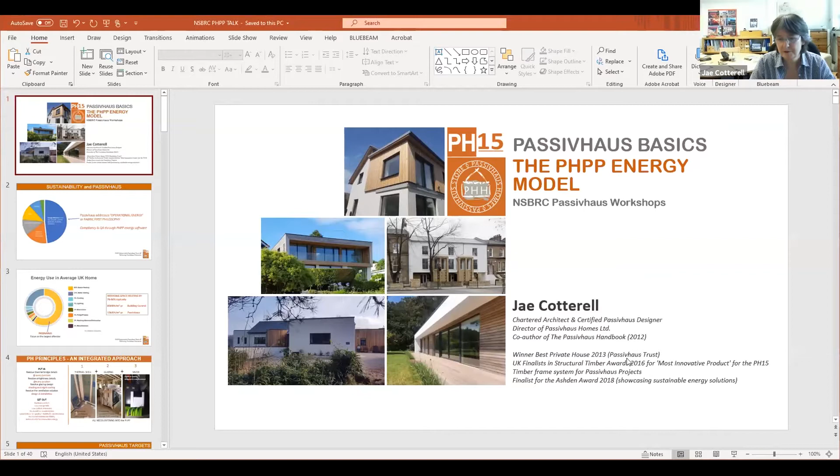I am an architect and I've gone slightly AWOL in that I now provide low carbon solutions for buildings, for net zero carbon housing if people want to go that far, using Passivhaus principles, in order to get the operational carbon really low. We're also interested in low embodied carbon and in using non-carbon fuel sources or low carbon fuel sources. So we're interested in those three things, and we use Passivhaus principles to get the operational carbon down, and we're using the PHPP energy model to check that and to design that.

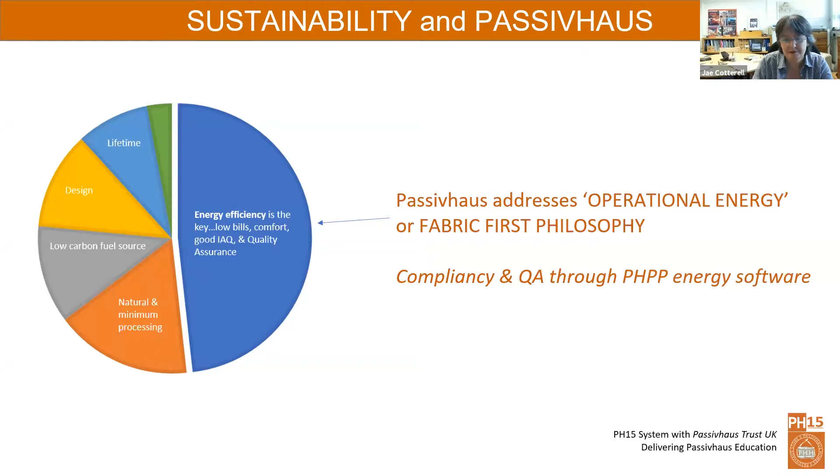So here we are talking about sustainable housing, and the three big bits of what I've just spoken about: the Passivhaus bit, which is the energy efficiency bit, the operational carbon, shown in blue, then there's natural and minimum processing, which is how you actually build a house, and then there's the low carbon fuel source. The compliance and quality assurance for the big blue bit is all done through the PHPP energy model.

When you're looking at operational carbon, you're looking at that big yellow bit, so that's all the operational energy that you're using in a house. Passivhaus focuses on the big element of it, which is the space heating, that's 60% of an average house's energy. If you're building a new house to building regulations, you'd be on average achieving something like 86 units of energy for every square metre of your house in a year, whereas the Passivhaus minimum, which is 15, is what you're allowed. So it's a 70 to 90% reduction when building to this sort of standard. It really is something quite significant.

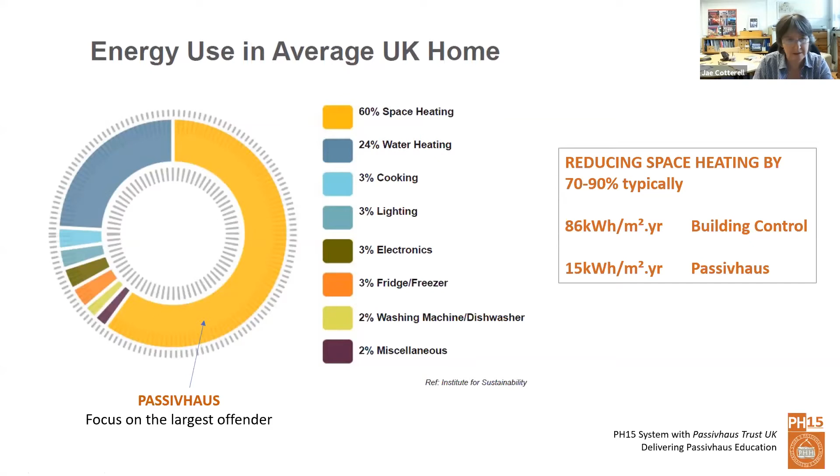It's an integrated approach, meaning you have to do various things to get various things out. The three main things you put in are the thermal shell, then any holes you make in it—filled with glazing or doors done to a very good standard—and then a ventilation solution. You can't take just one of those three and throw the others out; you need all three to come together.

Once you've done that process, you get your low carbon emissions, which I'm particularly interested in, but there are all sorts of other bonuses that come with it.

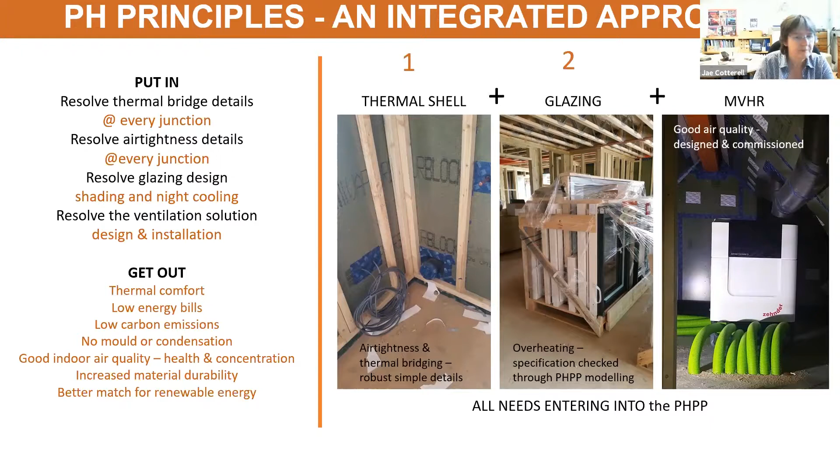When you come to the PHPP, you have three targets you can aim at. It used to be just one, the classic. Now there's plus and premium. Premium is very extensive—I've tried it once and it needed a huge amount of renewable energy. The middle one, plus, is basically where net zero carbon sits.

That's where you do the fabric-first ideas of Passivhaus—getting your house shell correct, getting your windows correct, getting the ventilation system—but then adding some renewable generation on site, getting it to a place where you're generating as much as you're using through an average year.

We try to model to the plus standard even if the client isn't wanting to go there, so they know at least what they need to do to get there and can perhaps plan for it in the future.

The targets that the PHPP modelling software spits out are the space heating—that 15 figure we talked about—but it also looks at all the energy of the house, including hot water and lighting and so forth.

The critical thing we use PHPP mostly for is calculating the overheating frequency, because once you go to these low carbon energy efficient houses, the risk isn't that you'll be too cold, but that you'll be too hot. PHPP is a way of looking at that and designing it out.

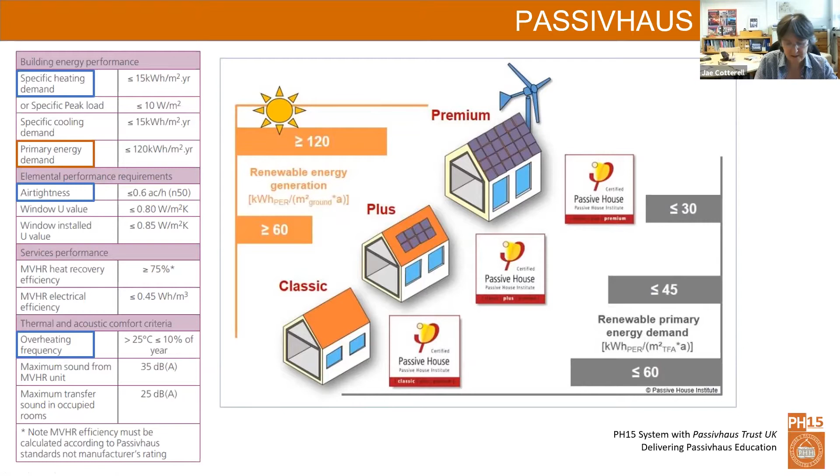It comes in the format of a disk. It's not actually very expensive, PHPP—it's very easy to buy. It comes as an Excel spreadsheet, basically lots and lots of pages, which I'm going to show you.

It has six dimensions to determine shading, because as I said, overheating is quite difficult. So it can be a bit time consuming and confusing, but it is accurate—known to be accurate. If you're not using it regularly, it's not very user friendly, I have to say.

It's the way every design is checked by an external certifier if you're going to certify to Passivhaus. So we will do a PHPP, but if it's going to be certified, it will always be checked by someone external to us.

The other option, if you're an architect—there are a few architects listening—is to go for design PH. That's a little more expensive. Basically it's a 3D design tool that plugs into SketchUp, which hopefully quite a few of you are familiar with.

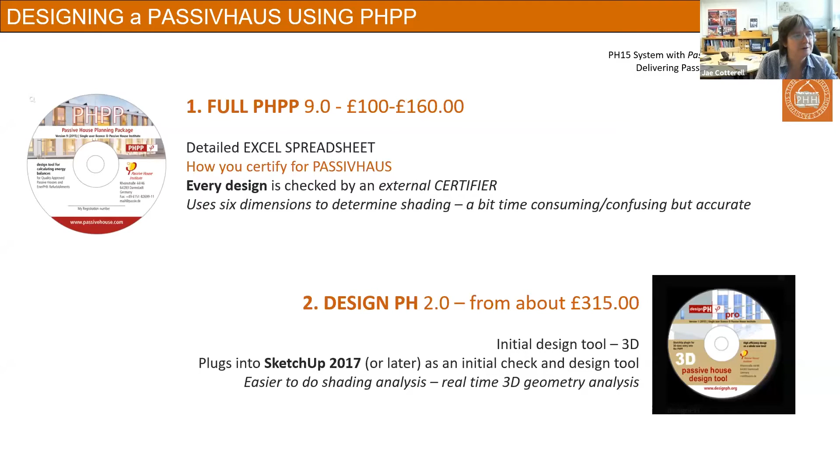It's much more user-friendly, less likely to make mistakes, and you can do really good shading analysis because it uses the 3D geometry to analyze it. So I'd recommend that to people who want to have a go but who are never going to become highly familiar with using PHPP—they'll be using somebody else to do that.

When you start using PHPP, you're looking at the planning stage. You want to design with either Design PH or the full PHPP before planning. We do the full PHPP before planning, and you end up with drawings a bit like this.

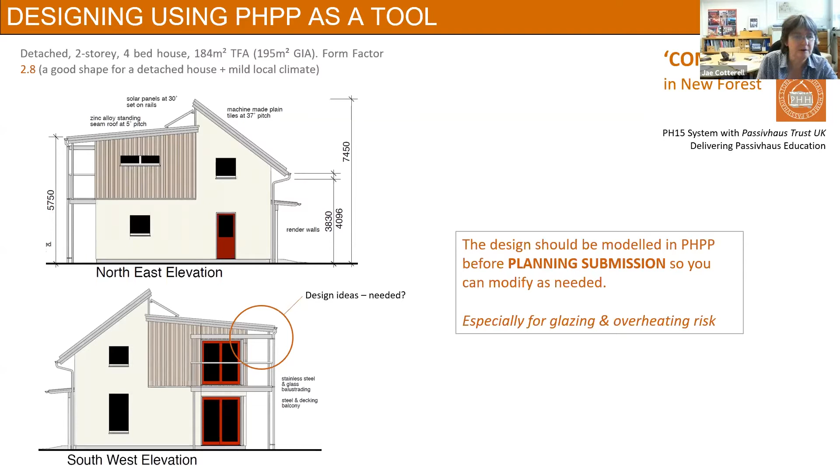This is a house in Compton that we're looking at here, and from here we can start to insert all the necessary data into the PHPP model. I'm going to show you now what the spreadsheet looks like when you open it up.

There's lots and lots of tabs along the bottom, and I'm going to go through the main tabs with you to show you the sort of detail that goes in when the PHPP is being done. The verification page at the beginning, which you'll see in a minute, is just telling you where you are with these headline figures.

But the first real tab is the climate, and there's lots of data preloaded in. Basically all you're doing is choosing where your site is. For this one, the nearest climate data set was Efford - I just pick this on a drop-down menu and it populates, and that's all you're doing. You're also adding your altitude. Strangely, altitude is very important to make sure you get it accurate for your particular site.

Interesting, because you can then take your house and fly it round in the PHPP, which I quite enjoy. This particular house was on the edge of the New Forest, but I could change the climate data and fly it to a site in Scotland to see how it performs there. There are big differences according to altitude and where you are, even within the UK.

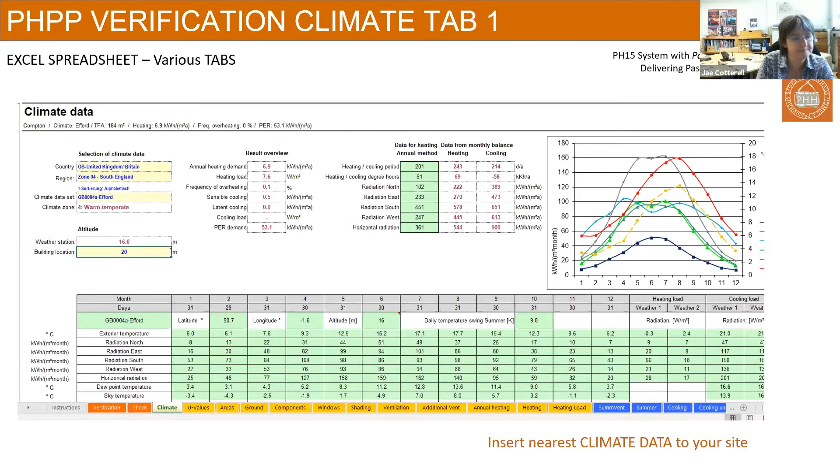And then you have to try and start thinking about how you're going to build it. Passivhaus U values have to be under 0.15 - that's the thermal efficiency of your walls, your roofs and your floors. Usually with our system, PH15, we're looking around getting to 0.1 to 0.13 to get past the line for Passivhaus.

So you're deciding on all your assemblies, and then you have to calculate the U value of each of those elements. You can, at the design stage, just assign notional U values, so you can sort of trick it, or just say I want it to be about this, or you could start to see what you need to get to for these elements in order to pass the line.

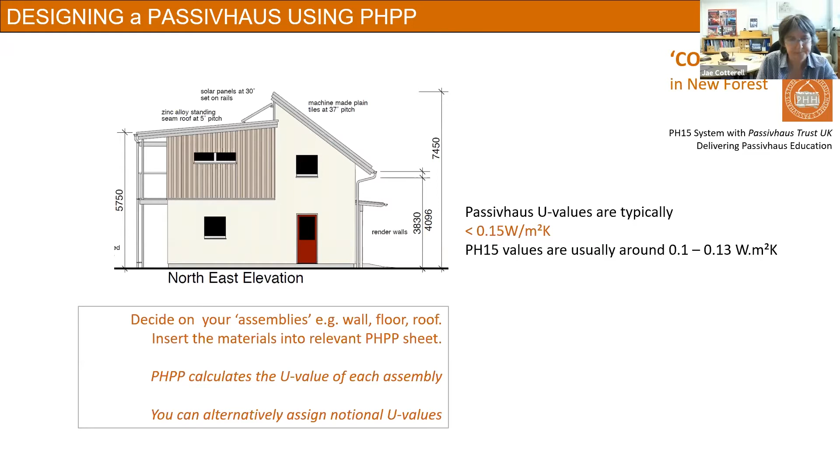I make this point here because obviously we're choosing timber, and that's because of the embodied carbon. This has got nothing to do with PHPP or Passivhaus, but you can see according to how you choose to build - Passivhaus is the way you build it, it doesn't have anything to say about how you're building it, you just need to build it to the principles. But you can see that there's 4 times more carbon in traditional masonry when you're building to this sort of standard, 3 times in SIPs with oil-based insulation compared to a timber frame. And that's why we go timber frame, because of the embodied carbon.

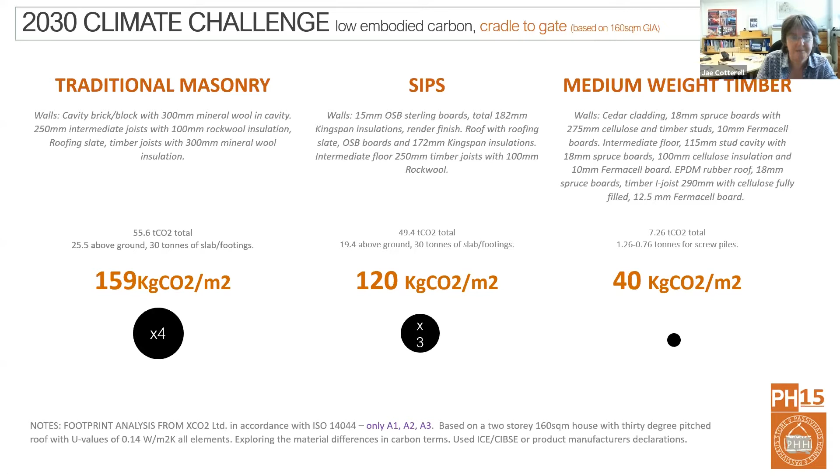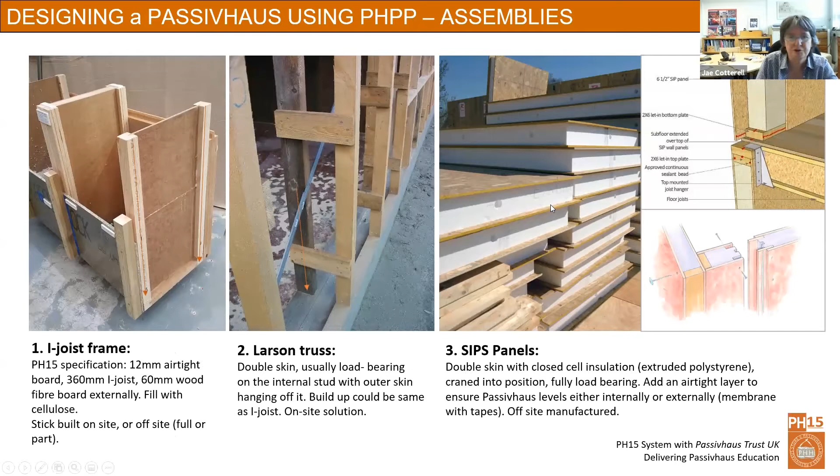So here's three different timber frame assemblies, just to give you an idea what we mean. This is the way I build, with an I-joist and an airtight board and wood fibre. This is called a Larson truss, and here's a typical SIPS panel. So you have to choose your assemblies, and that's for your roof as well and for your floor.

Now we come to the actual verification page. There's a few interesting things on the verification page, just to show you how detailed they are. There's something here called the specific capacity, which is which one you've chosen - masonry's heavy weight, our system is deemed medium weight, and that SIPS solution would be deemed lightweight. You put a figure in here to reflect the thermal mass of your chosen construction method.

And then it makes a few assumptions as well, like it assumes how many people are going to be in your house, depending on how big it is when you start to fill it out. You might find that you're going to have more or less people than that, and there's a little button here that you can use to determine how many people are in the house. If you're doing social housing as an architect, I would suggest you might want to check it for having a higher occupancy level and see how it performs. So it lets you have a little play with those sorts of ideas as well.

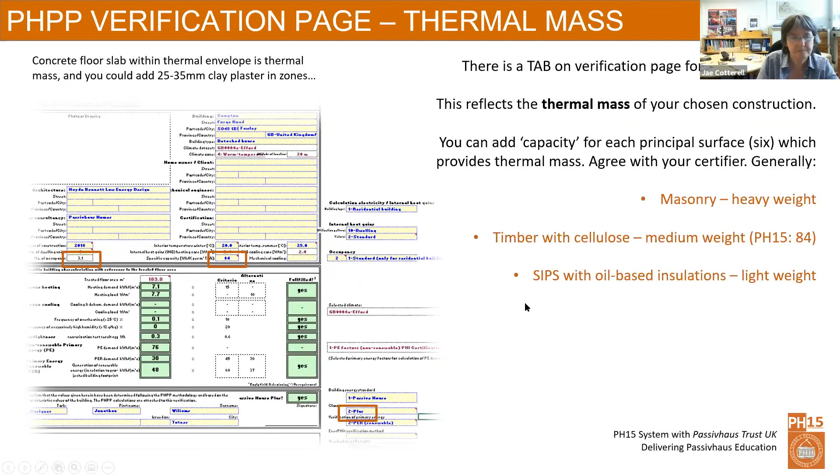And then down here you choose which of these 3 standards you're going for - are you going for a classic? Here we're looking to see at the plus standard, have we passed, and here are the headline figures, and here are whether we fulfilled them or not. And we go to the next sheet now, and this is the U values, and you can see you label each of your assemblies and you put in what you need - so this is a ground floor slab.

We've got a concrete slab here. This is called the thermal conductivity - every material in the universe has one. You find out what that number is and put it in, then say how much thickness you have of each material. I've got 175 of Celotex, and it calculates the U value out. Generally all the yellow boxes are where you put things in, and the green boxes are where the PHPP calculates it. The lower the U value, the better it is.

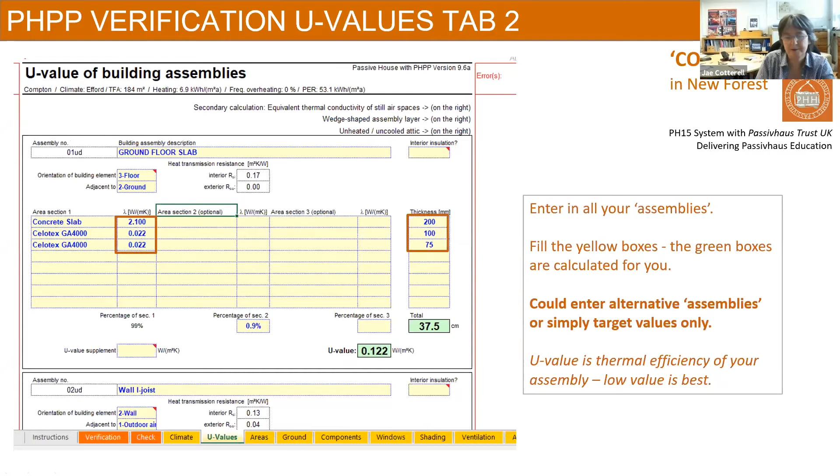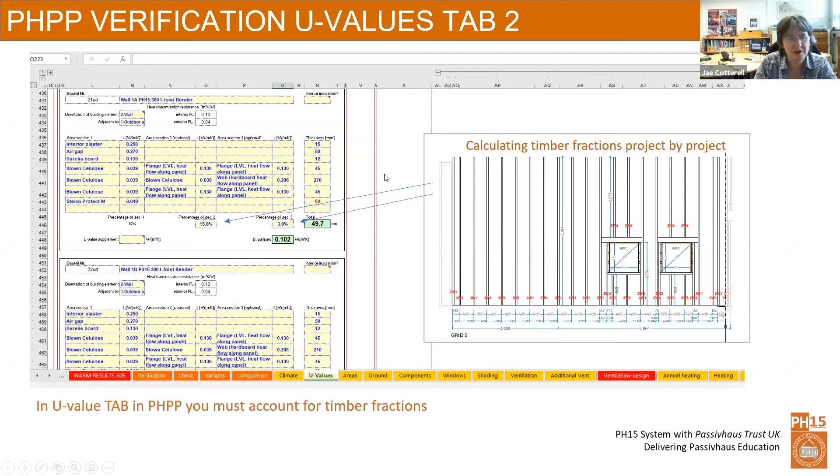It gets a bit more complicated sometimes. This is our wall where there's lots of insulation, but there's actually some timber in this wall - it's a timber frame. You can see there's lots of timber here. I'm saying 15% of that insulation is actually bits of timber flanges, and I've got some webs for my I-joists at 3%, and that adjusts the U value up to account for all this timber in my wall. This is what happens when you have poorly designed timber, lots and lots of it - what's called the timber fraction - and that will severely affect your U value at the end.

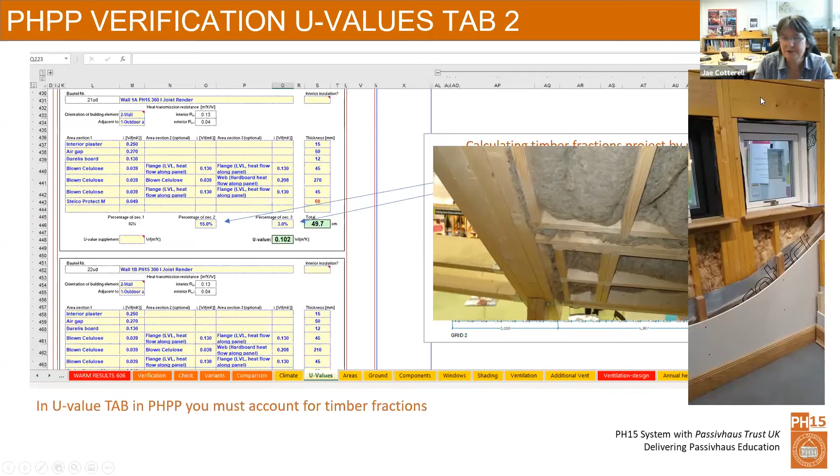Passivhaus is very rigorous about this sort of thing. It won't let you just put in a point U value - it wants to know how you've actually designed this house, and we have to show the certifier to justify these figures so we're not fooling anybody. Here's another example of a wall very badly done. Someone actually thinks that's good, but when you think about how much of this wall has been stuffed full of poorly designed timber structure, it's really going to affect your U values.

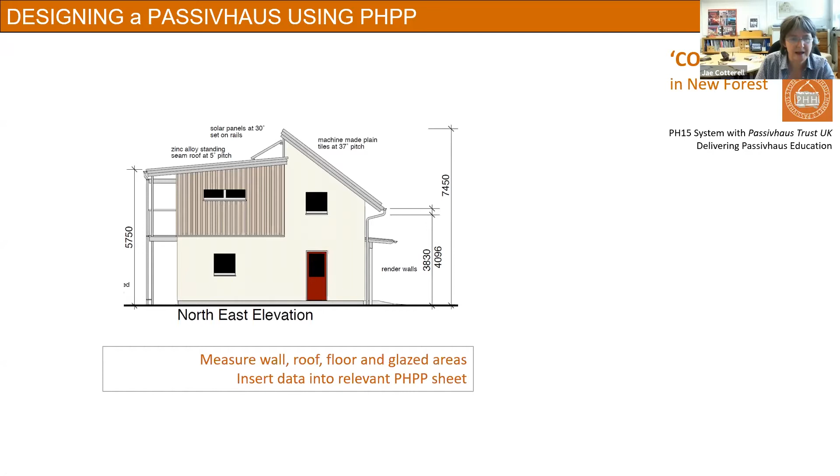Now we start actually measuring the areas - your walls, floors, roofs and glazing areas - and you put them into a sheet. I'm just going to show you how you measure, briefly. This is getting a little technical, but you take the whole height of the insulated element right from the top on the outside edge to the bottom - here's a floor with a concrete floor and some insulation, and you go right to the outside edge of the insulation. So you actually end up slightly over-calculating the areas.

The difficulties always come where elements join - this is where we get thermal bridges, which PHPP is very thorough in covering. If you do a bad detail where this joins here, you might have, say, 30 meters of this poor detail that's really leaking a lot of energy. If you have a good or poor detail, you need to prove it by doing a little model. This one happens to be a very good detail, and it comes out with a negative psi value, which is very good.

The reason you can get a negative psi value is that you're over-egging your areas when you're doing this - that area there is being measured twice. So if you do this little join in the middle very well, you can end up with a negative psi value and a little bit of benefit there.

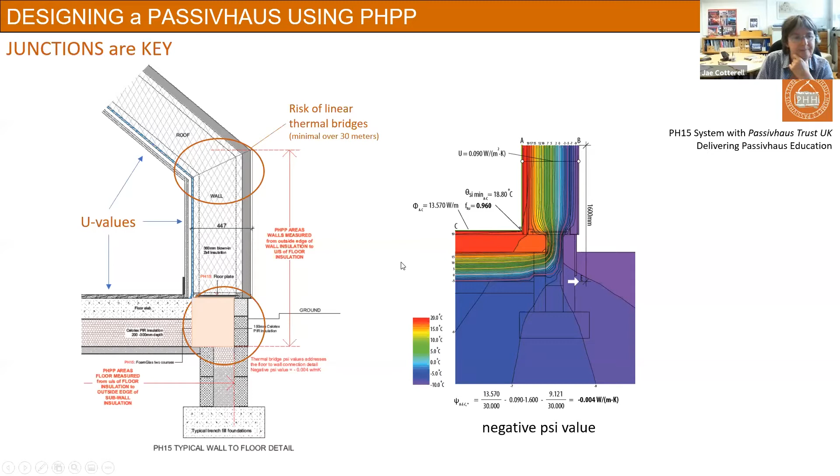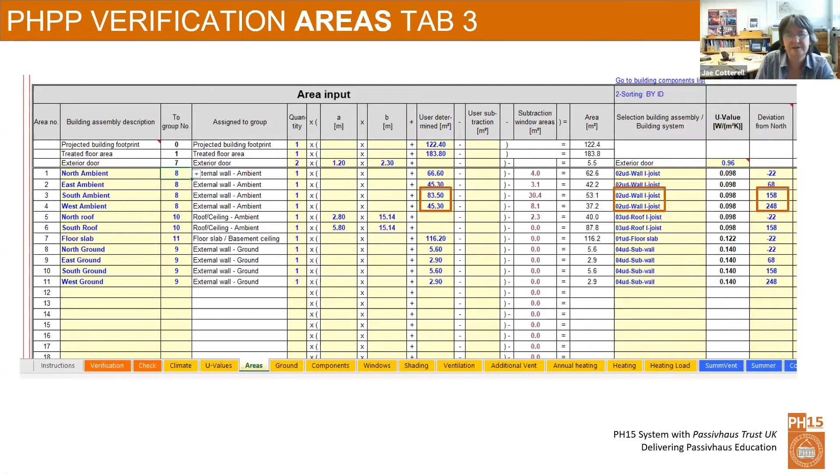So you're putting in your walls here - here's one, this is a south wall. I've got a south wall, and I'm putting in an area. I've measured how big it is and assigned which of my assemblies from that first sheet - so this is a wall I-joist, already worked in. It puts all that data in, and I also put in its deviation from north, so it knows how big the wall is, what its orientation - south, north, east or west - is, and how it's built.

Then I go on to my windows. I'm not going to talk too much about this other than to say that with our uplift from building regs to Passivhaus, we normally think ours is around the 5% mark, and half of that will be the windows - because they're so important. There's lots going on with them; they're not at all like just a standard UK window.

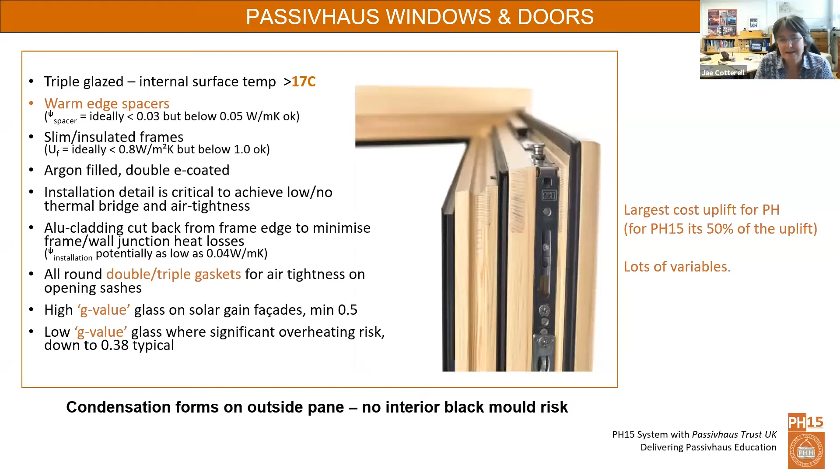So there's the air tightness around, you know, there's these three gaskets, and also the glass that goes in it. There's all sorts of things you can do with the glass, letting more sun in, letting less sun in, and all that information is going into the PHPP.

So we're on the next tab here. I'll just talk a little bit about, we've done U values and areas. This ground one is pre-filled in by the Passivhaus Institute. We never really mess with it, though I think if you had some strange ground conditions, you might have to. The components section is just where there's preloaded lots of components.

So lots of windows and glazing things and ventilation systems are preloaded into this area, and then you can pick them out when you put your windows sheet in. So here, this will have been picked out from a list in the components, and this window will have been picked out from the components. We actually have a pre-filled out PHPP where the windows and glazing elements that we use in our system are already all listed in there, and you literally just press a button here and you have a drop down menu, you click and up it comes, and then it starts to populate all the data.

So all I actually need to do is number my window, give it its opening, and tell it which of the walls that I have put in the area sheet it belongs to. Then it knows the size of the window, which wall it's in, which glazing, what sort of glazing it has in it, and which frame, which window itself, the frame of the window it is, and then it will calculate all the rest of it.

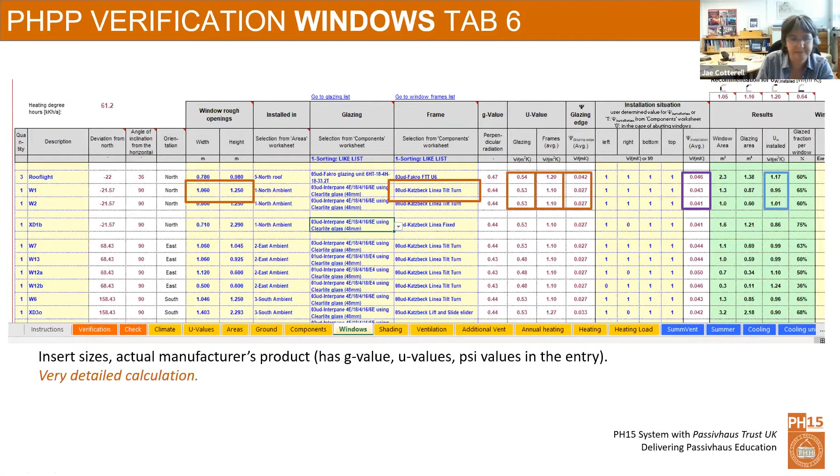This is just a little bit of a confusing slide, perhaps, but I'm showing this as a window sitting in a wall, and it's an okay installation detail, and there's a psi value for that. This has been modelled, and it's 0.029.

I only say this because this one is much better, 0.019. The reason is there's just a few tweaks been made. It's been pushed a little bit back in the window, in the wall. This one is more to the edge of the wall, and the metal cladding on the outside has been cut back on this window, and it's not been cut back on that window.

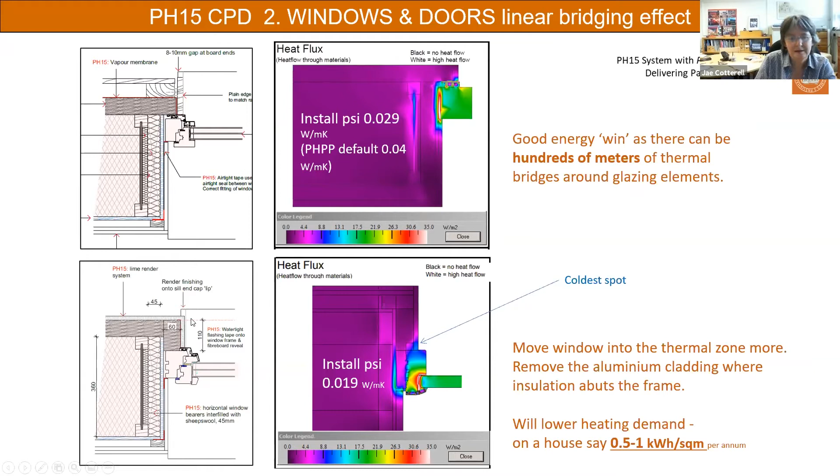None of these have got anything to do with price. This is just to do with good design, and that's why, with us, with our system, we're always tweaking it, because actually good performance doesn't necessarily mean money. Sometimes it just needs thought and an understanding of what you're doing.

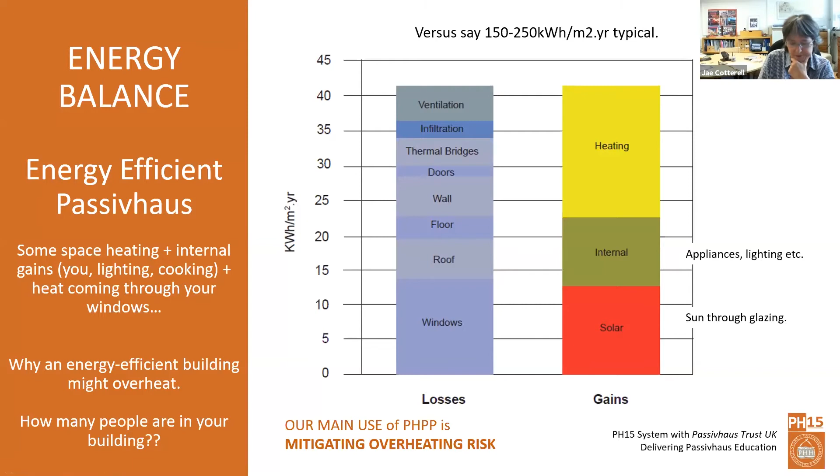And that's why if this gets out of kilter, you soon begin to have problems with being too hot. That's why low energy houses are so sensitive, and that's why there's a tab especially just for shading. This is actually the tab that we spend most time on.

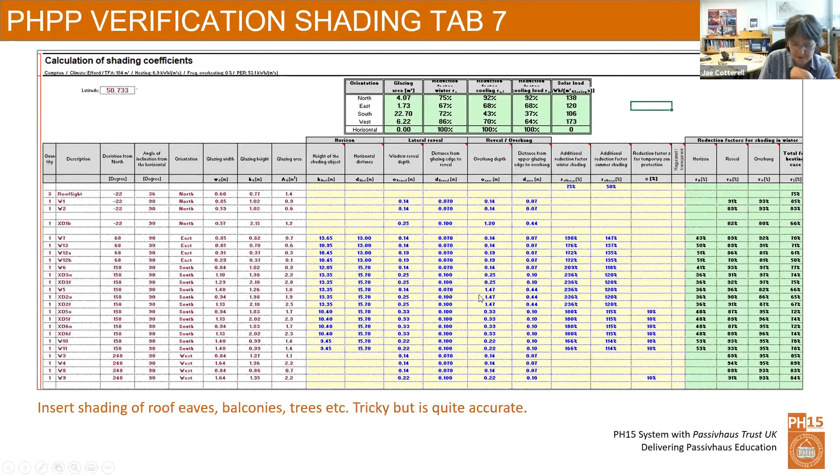And then this is if I'm using any external blinds to shade. So there's all sorts of things I can do, plus the glass itself, which I just mentioned, the quality of the glass, or what's called the G value of the glass, I can change in my windows. That will change how much sun is allowed through the window or not. So there's lots of different things that you can do to tweak your overheating risk.

We will choose windows in our houses for night ventilation, and we'll discuss those with the client. So if you're thinking of building a house, you've got to think which of these windows you'll use for night cooling on very hot summer evenings. Then we'll give the client the choice of perhaps adding fly screens to those windows.

It's really important - if you were to take the quantity out, put naught in there, and went back to the verification page, you'd see how significant having those is to hot summer days and nights, and how important it is to have a night cooling strategy. Therefore user behaviour is actually quite important in an energy efficient house. If you didn't do that behaviour, you'd be much more uncomfortable in that house for 2, 3, 4 weeks possibly of the year.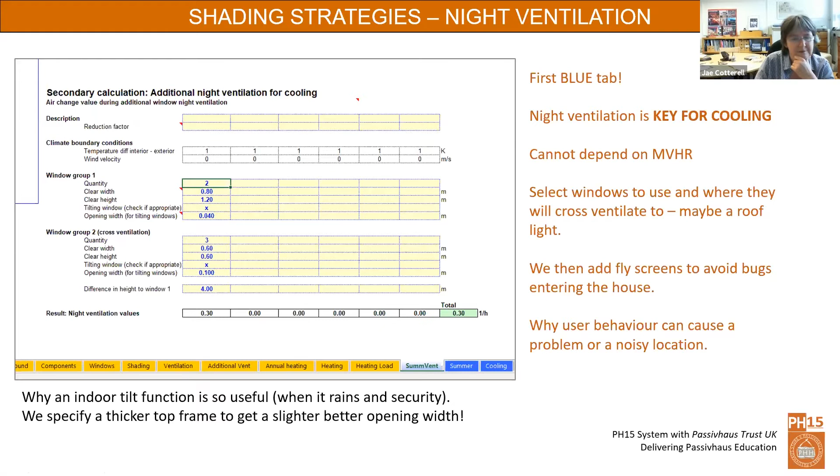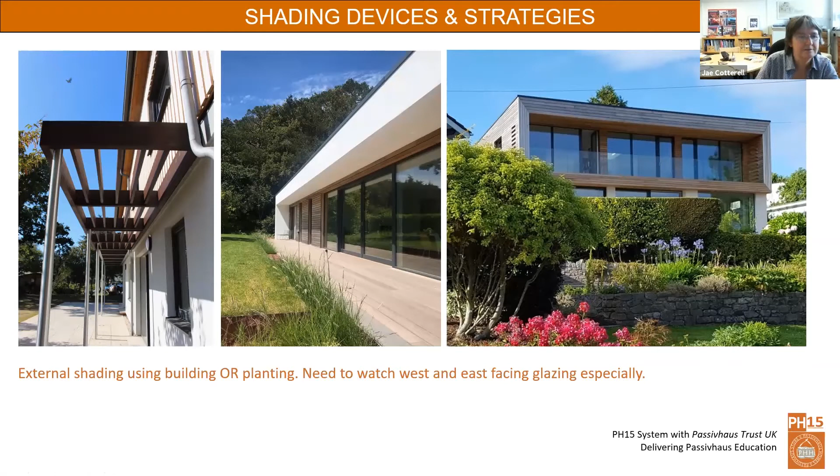And these are the sort of shading devices you might be using. So just overhangs, we've got overhangs there. We've got an actual shading device being built onto a house here. Here we've got a veranda being used to provide some shading.

And then you've also got things like this - we have the option in our windows for external blinds that come attached to the windows, get built in, and then you can see it come down. When it's up, it's hidden in the wall, so you wouldn't know it was there. They're electrically operated, and quite a good solution for windows where you might have a problem.

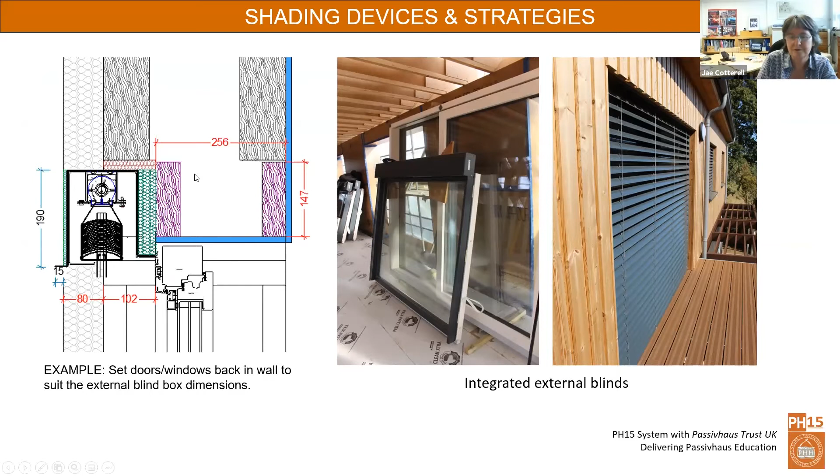Now, the reason I'm going on about this with the PHPP is because we have a warming climate, and we stress test our houses, and we find that maybe the overheating percentage could treble in the lifetime of that home. So let's say by 2050 or 2060, your house, which was designed to overheat maybe 8% of the year, might find it's now a quarter of the year too warm.

So the Passivhaus standard allows you 10% of the year for your house to be over 25 degrees. Well, that's far too much. The Passivhaus Trust says that 5% should be the maximum, and we try to get under 2% because it's not a static thing - we know we're going to have warmer and warmer summers as we move forward.

The final thing is MVHR, the ventilation system. You have to put in a Passivhaus certified unit - it's the only thing that must be certified in a Passivhaus. You're basically supplying fresh air into all your living spaces, and taking it out of your wet, smelly spaces. You're choosing to control your ventilation rather than having uncontrolled ventilation, which is what we live with at the moment in the UK.

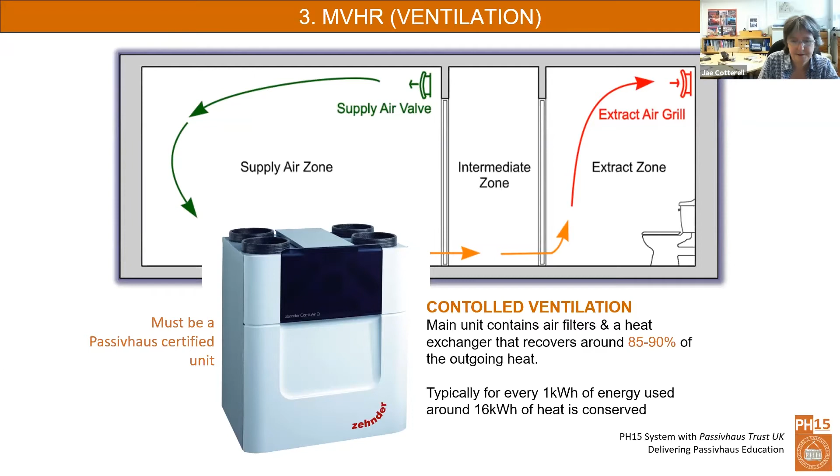And for every unit of energy that unit is using, typically you will be conserving 16 units. So it's a very efficient way of providing your ventilation. Here's some pictures just to show you need to provide some space - this is a big house, but it's to show you how significant the space might need to be for a ventilation system. This is one sort of a tree supply of the ducts.

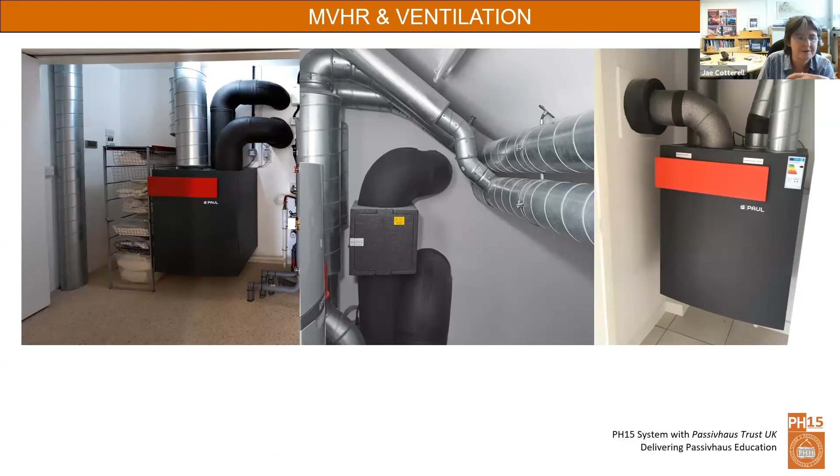Here's one that we do - we do a radial system. So each house would have 1 or 2 of these ducts going to it. There's a couple of distribution boxes, one for the supply, one for the extract. Here's the main unit - so there's a lot of these ducts flying around the house to supply your fresh air.

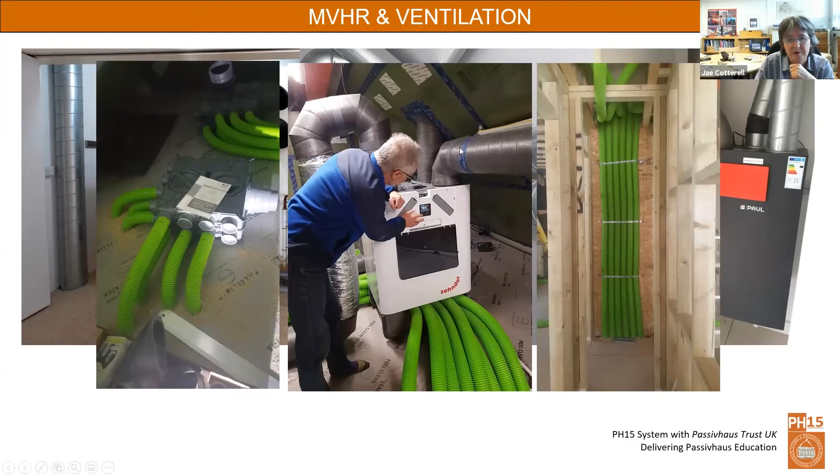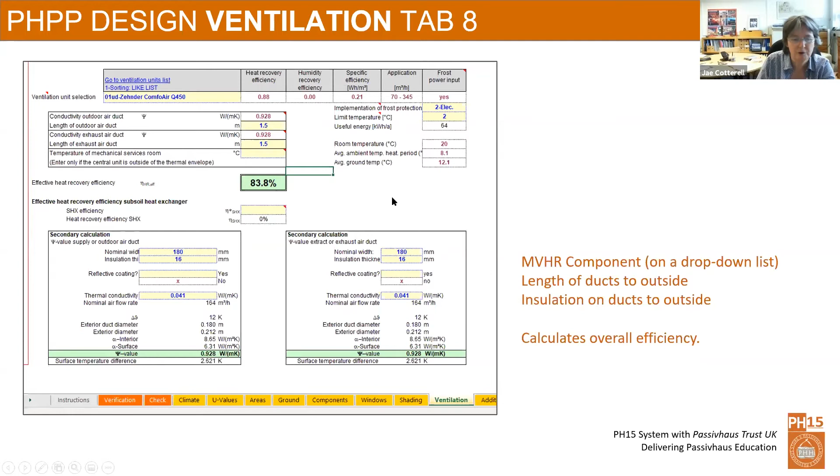There's a few things that are significant about it that the PHPP is interested in: the length of the ducts from the unit to the outside, and how well insulated they are. So when you come to this tab, you have to put in the length of the outdoor air duct, its size, and how much insulation is on it. You'll be surprised how much that affects the effective efficiency of your unit.

Not too complicated to fill in, but very key to overall performance. So all the elements are important - your assemblies, your glazing and the MVHR - and it's essential to have someone who's familiar with PHPP, or who's going to take quite a bit of time making sure it's right. It does help to use a known system.

Once it's all loaded into your PHPP, then you can have a bit of fun, because none of this so far has been fun really - it's just been a task of number crunching. But once you put it in, you can start to play with it, and that really is fun. You can add insulation depth, amend U values up and down, change the materials, swap windows and doors, take them in and out, change their sizes, change the glass spec, add shading, and change your MVHR. All these things you can do in a twinkle of an eye, and you can see the results.

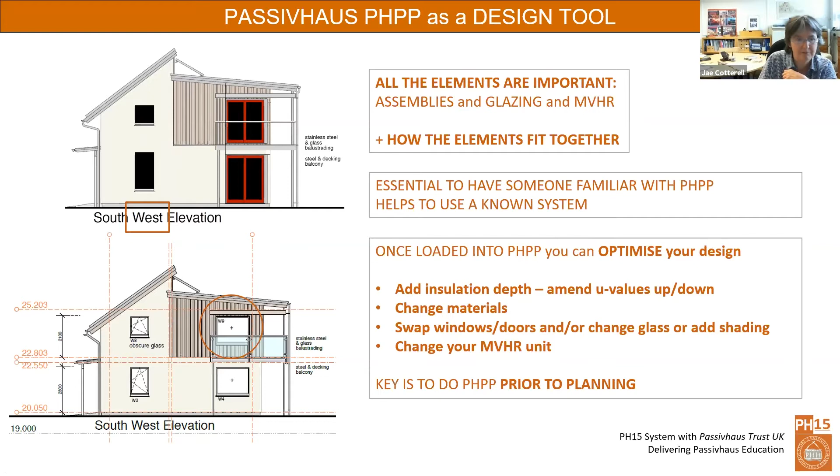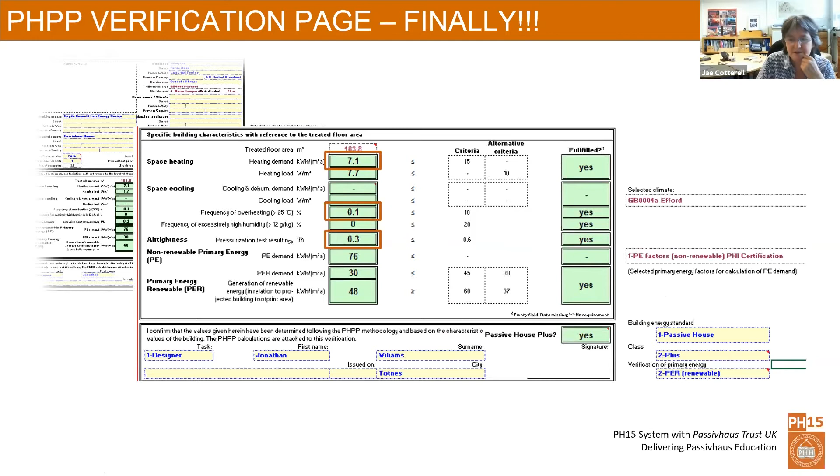You can see here that we're on the Passivhaus Plus scale. So did it become a Passivhaus Plus? No, it became a Passivhaus Classic. Why was that? Well, that's because it actually has a gas boiler in it. I want to address that a little bit because it's interesting - so you've done your passive house, but how you then heat it affects whether you're classic or plus.

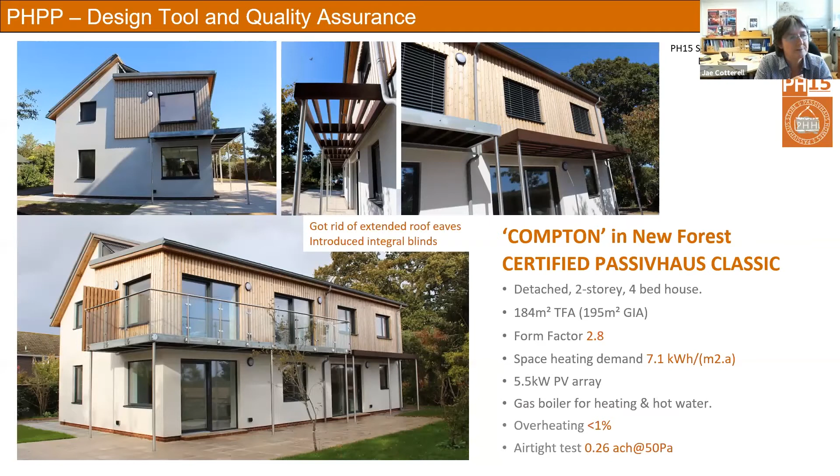I've just entitled this slide Design Tool and Quality Assurance. I hope you can see that it is a design tool, which something like SAP is not - it's very unique in that way. But it's also quality assurance because it's so thorough, and somebody independent is going to be checking it if you certify it.

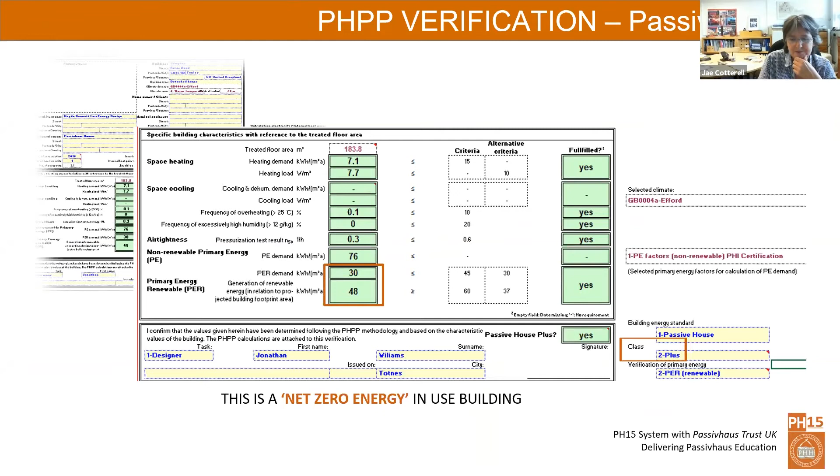At the plus level, it could be a Passivhaus Plus, which means it could be a net zero energy building. The difference between the classic and the plus is just the difference between a gas boiler and an air source heat pump. So they ended up with a gas boiler and some PV, and that's 1.1 tonnes of carbon a year emitted to run that house. But if you swap out the gas boiler with an air source heat pump, it drops to 0.2 tonnes.

So that's the amount of carbon that the house is costing the environment - very, very different. Even though you've done all those things right, the same house will make a big difference according to its energy source. And that is the difference between classic and plus.

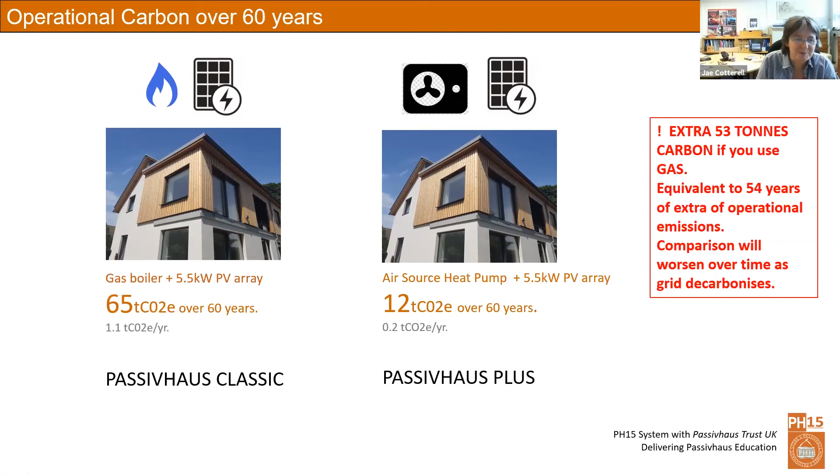The difference in cost, of course, is between a gas boiler at say 2K and an air source heat pump at say 8K.

And the reason for the difference in carbon is because the carbon intensity of gas is around 270 grams per unit of energy, whereas you can see this blue line of electricity has plummeted over the last 7-8 years, and that's as we are beginning to decarbonise the grid. So you can see in the UK we're actually doing quite well - it's a good news story.

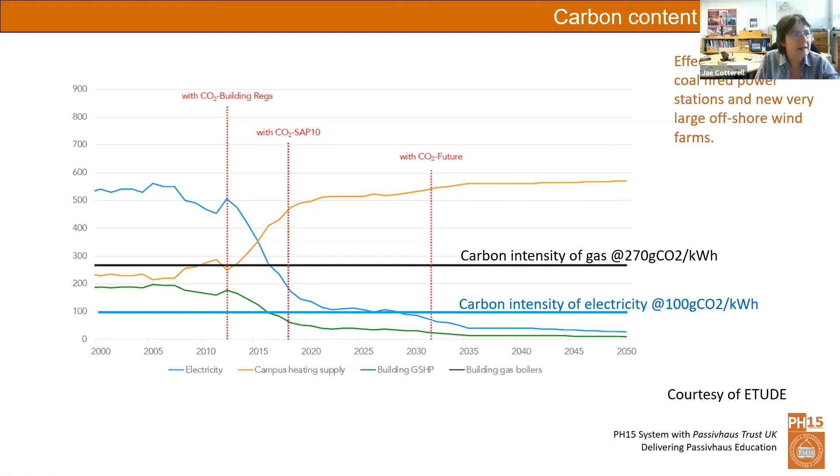And you can see towards 2050 - I did that calculation based on 100 grams of carbon per unit of energy - that house will begin to use even less energy over time, whereas it will stay the same with gas. So this is why we encourage people to design their low carbon houses using electric energy.

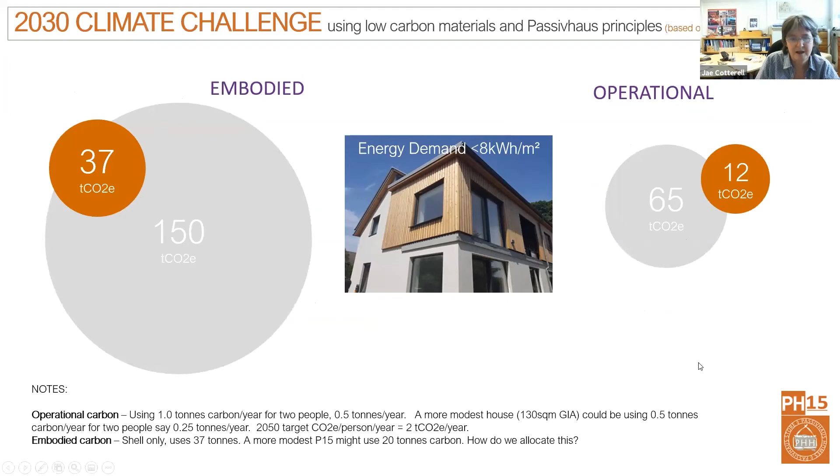And here's the same house again, just showing the amount of carbon if you did gas and used masonry to build it, and here's timber and electric. So it's the same standard, same energy demand, but the difference in carbon terms can be quite significant according to the other choices that you make. And there's the finished house.

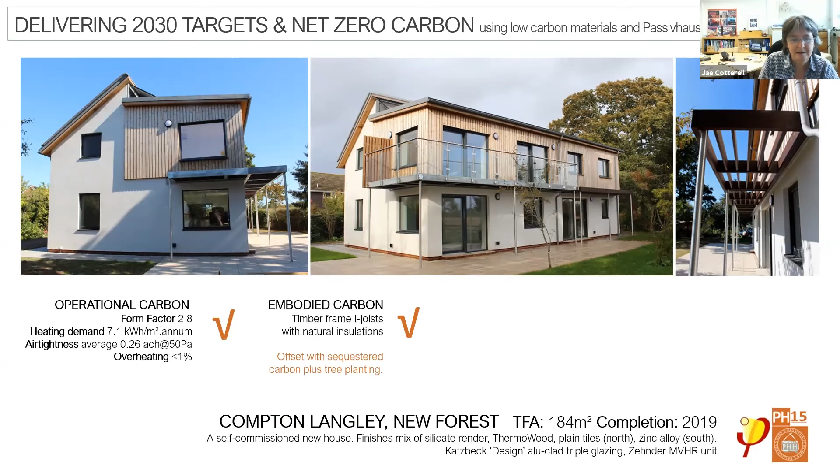So yes, it's very good in terms of its operational carbon, and that's what the PHPP was doing. It's good in terms of embodied carbon, and it's quite good actually - that was the cost of it, about £1,900 per square metre. Not so good in terms of its energy source. So lots of elements coming together in the end, much bigger than just passive house.

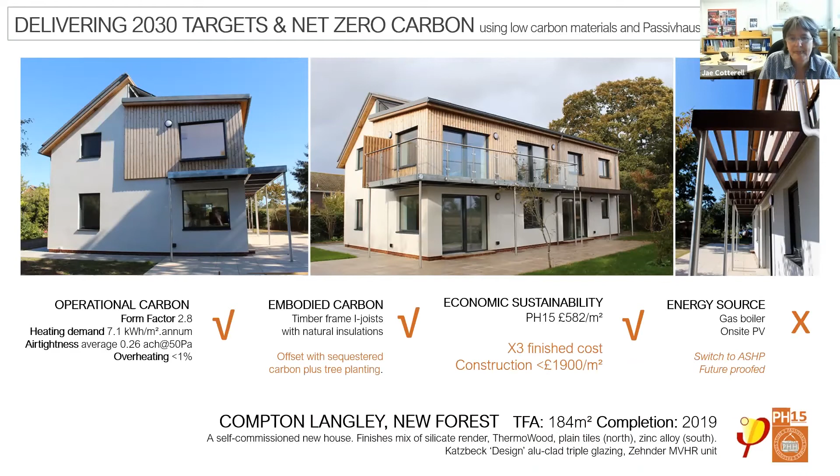So I'm coming to the end of my talk now. I'm just going to show you another couple of houses we've done. Really, the house itself can look as you like it - the difference will just be in cost.

I hope we're going to have some time left to do a few questions, and Katie's hopefully going to join us again. Hi Jae, thank you very much.